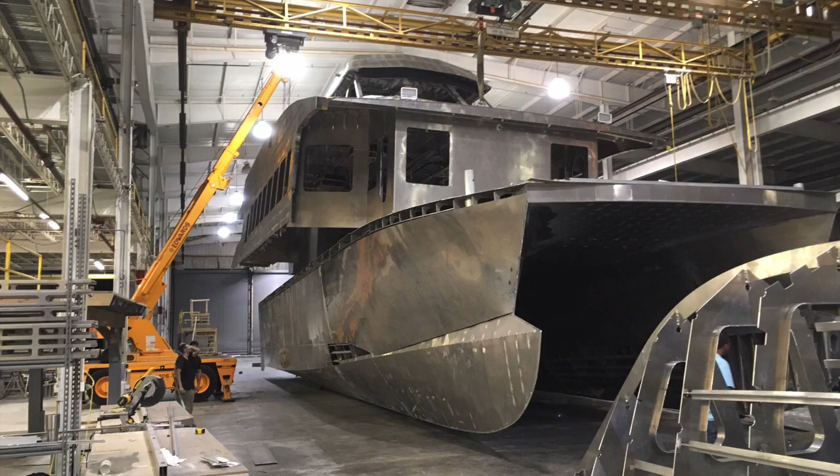I've been in the aluminum boat building industry now for 29 years. We're here today in the training center, and we're in the process of creating training videos to train our internal staff and grow the group. What I want to do is share with you some tricks with regard to the use of some of the small tools, and this will be really very specific to the fabrication of aluminum. So thanks for joining us.

I wanted to start out with one of the most common ones, one of the most dangerous ones, and one of the most misused ones, and that's an angle grinder. So this is a 9005B Makita grinder. This is one of my favorites. I do not represent Makita in any way. There's plenty of acceptable grinders to use. However, there's also some grinders which we really don't want to see here, and you really don't want to use for aluminum fabrication, even if you're doing it in your garage.

If you have a switch on the top here, and you're going to push that, it locks on. Almost all those lock on. But you never want to grind with that trigger locked on. So you want a trigger style thing, like a gun, okay? And it does have a lock, and there's no real good way to take that out, otherwise I would do that. Okay, we like this grinder for a number of reasons, and there's some good DeWalt ones and other brands. But we like it for a number of reasons.

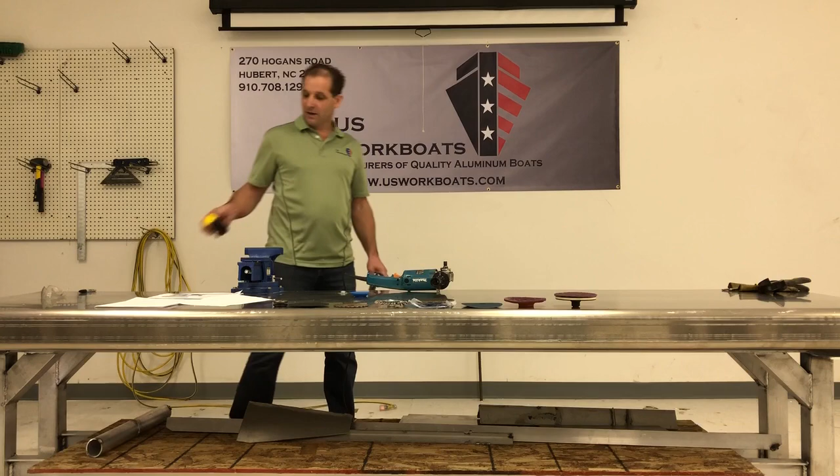The nut, okay, is actually a 5/8 nut. It's a 5/8 nut, and this is also another one. It's a 5/8 nut, and it has an inside hole here where it comes in. It's 5/8 of an inch inside. Okay, now I was using this stone yesterday. Kyle and I fabricated this bench out of mostly scraps out of the junk bin, by the way. And this is the most common setup to be used, 98% of the time. It's a flex cut grinding wheel.

Okay. It uses a certain backing pad. It comes new in the bag, in the box. This is set up for grinding of non-ferrous metals. This is the only pad to use with this wheel. Okay, this is the backing pad and the nut. It's a flush nut. Sits in there.

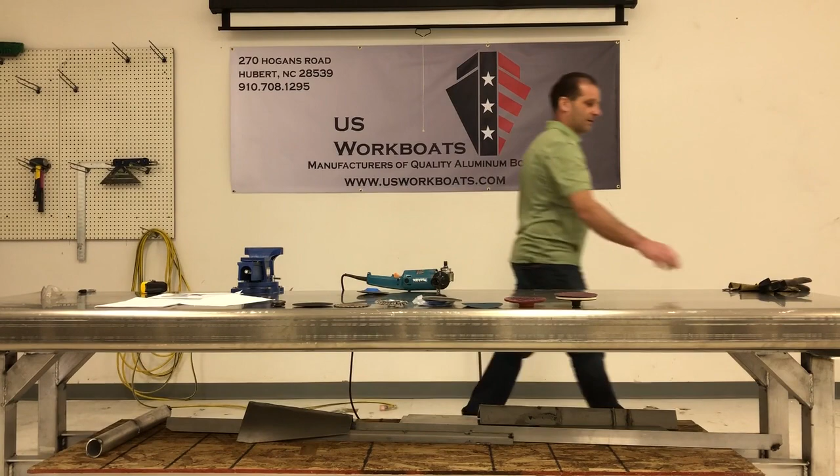When you buy one of these grinders new, it comes with a couple other things. It comes with this, which happens to be a simple little wrench, which happens to fit. I've seen plenty of you guys over at the vise screwing with this thing, right? That actually fits that. Now, most of you guys would just throw this in the trash, but it actually is handy to keep in your toolbox. It does fit that as well. It also comes with a guard. Now that guard definitely doesn't want to get thrown away. We want to keep that, but we only want to use that for a couple of different operations.

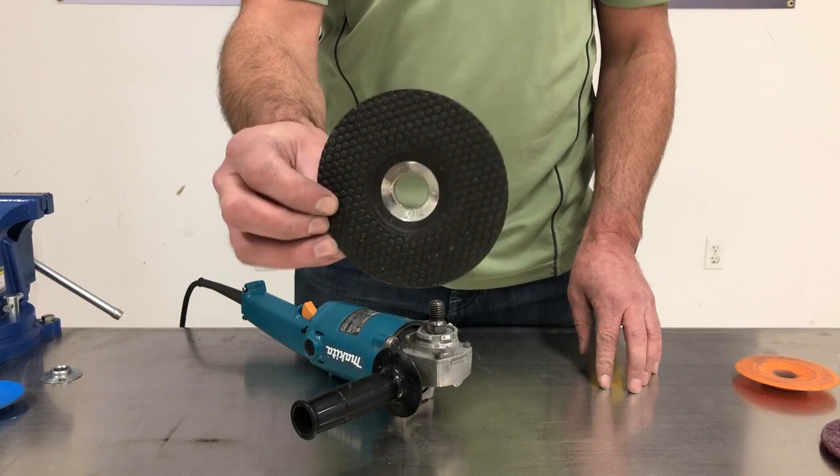Okay, we're going to go over the proper installation of a flex cut grinding wheel. This grinding wheel, as you can see, has a 7/8 arbor. It has a convex shape on it. It's got some bumps on it. This thing is specifically for grinding of non-ferrous metals, and for the proper installation of this thing, it's going to take a special backing pad that goes with it. They come new in a box.

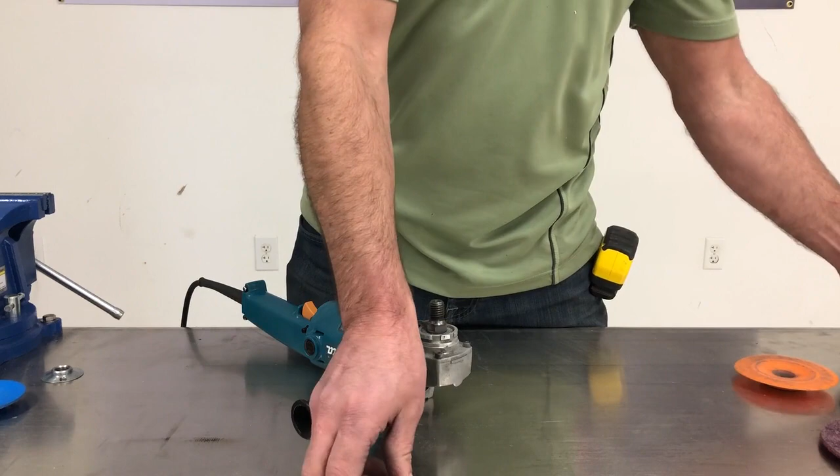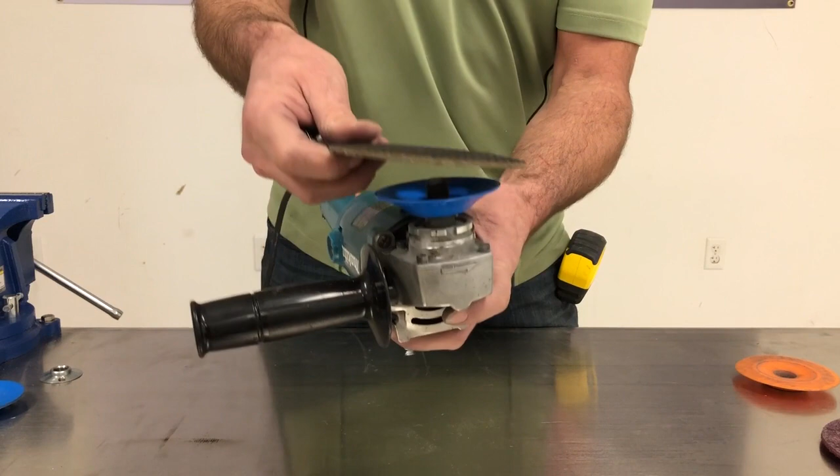These things come together. This thing goes ahead. It has a little metal piece in the back that's inset into it. 5/8 hole in the center, and then this here is 7/8. It's going to fit in there. This nut is going to go on. We must use this nut. You can see it's very thin, and it's got some shape here that goes into this dish.

Okay, we don't require a whole lot of tension on this. We can go ahead and just hold that lock and tighten it just about that much, and we're gonna be good to go.

Okay, we're gonna go ahead and put this sanding disc onto this angle grinder. And to do that, we need the proper backing pad. This is an example of a backing pad that's gonna work just fine for us. There's some things that we don't wanna use. We do not wanna use this. That's for our flex cut wheel. We do not wanna use this backing pad either, definitely the wrong one. We're gonna use something like this that supports this thing out near the edge. This one's actually designed for 4.5, and this is a 5.

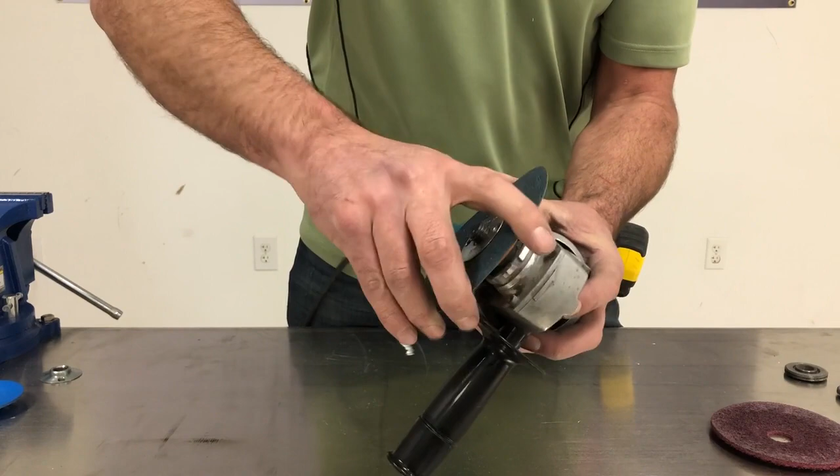They do make this in a 5, and I don't have one with me today, but the proper installation of that, it's gonna go ahead and go on there. We're gonna use this nut. It's important that we get this 7/8 center in here, into this. We push that in there, it's gonna go through. So, let's see if we can't get that started on there. We make sure as we're threading it in that it's actually in the center, otherwise it's gonna wobble all over the place on us. And that's gonna be a properly installed sanding disc, okay? And when we're doing our grinding work, it's gonna be flexible for us, and it's gonna finish stuff real nice.

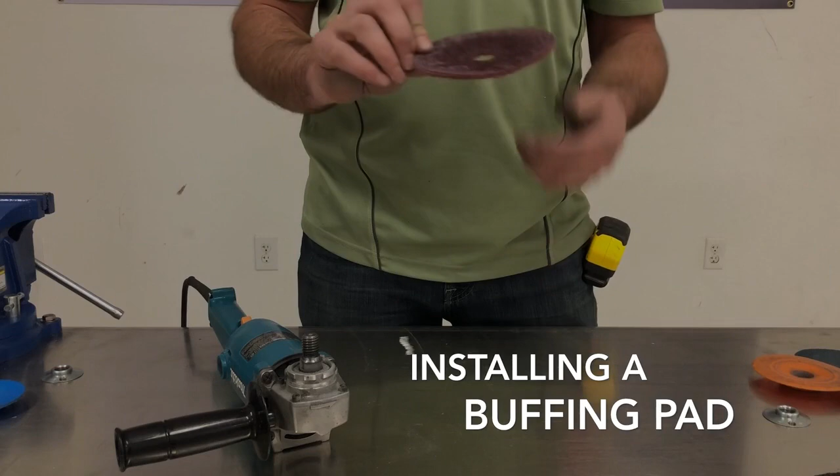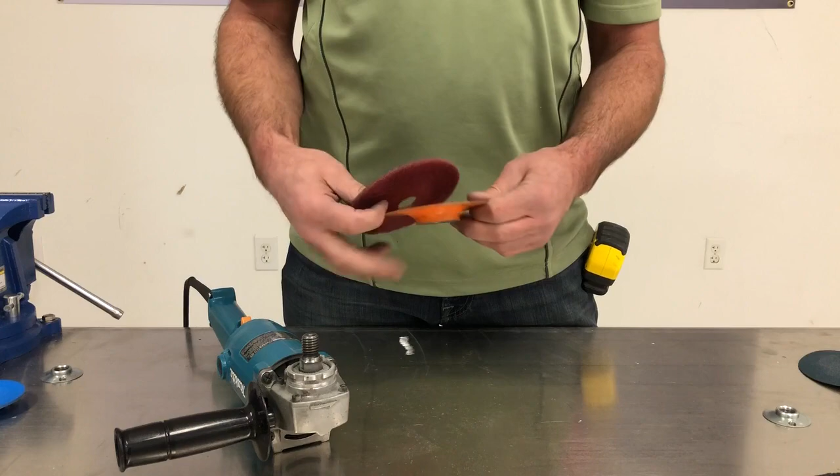We're gonna go ahead and install this. This here is a polishing disc, but you could use this to wash your dishes with. Very similar product, okay? It's not made of much, it's real bendy. It needs to have some proper support on the back. This is an acceptable backing pad for it. This is the same as you would use for the sanding disc here. But when we put that on there, we're gonna wanna use one of these nuts here, one of these tapered nuts. And it's gonna go on there and assemble just like this on our grinder.

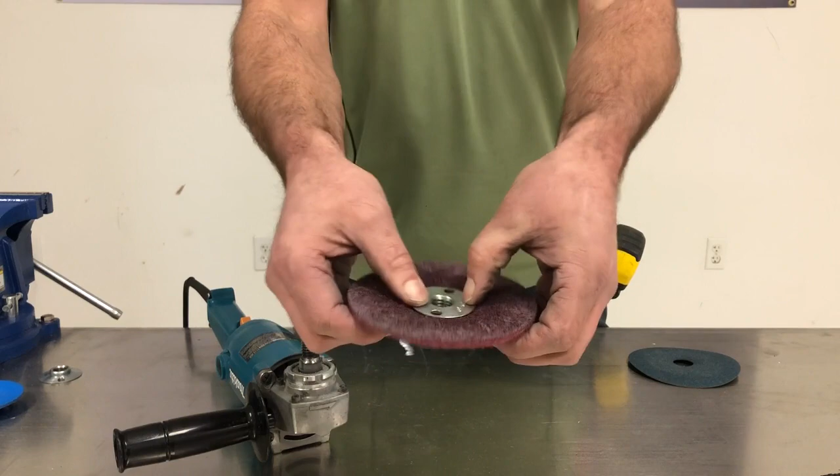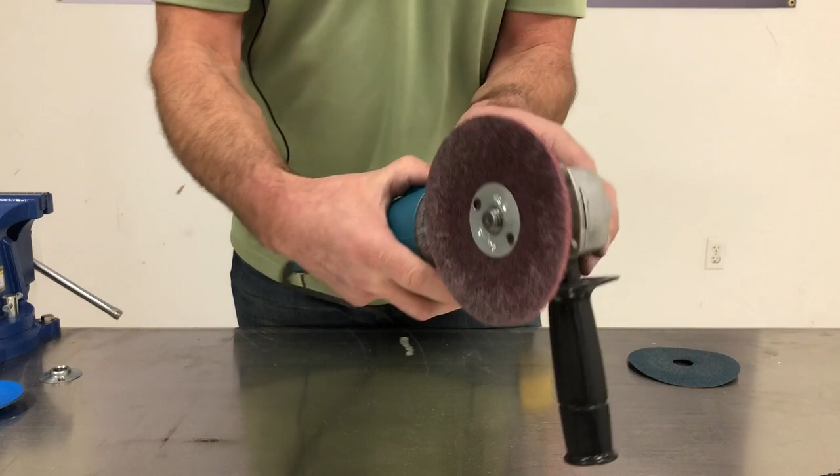We'll go ahead and put them on. As you can see, when we screw that in, it's gonna be down in below the surface in there, right like that. And that's gonna hold that wheel on there real nice. It's also gonna allow it some flexibility when we're doing our grinding work.

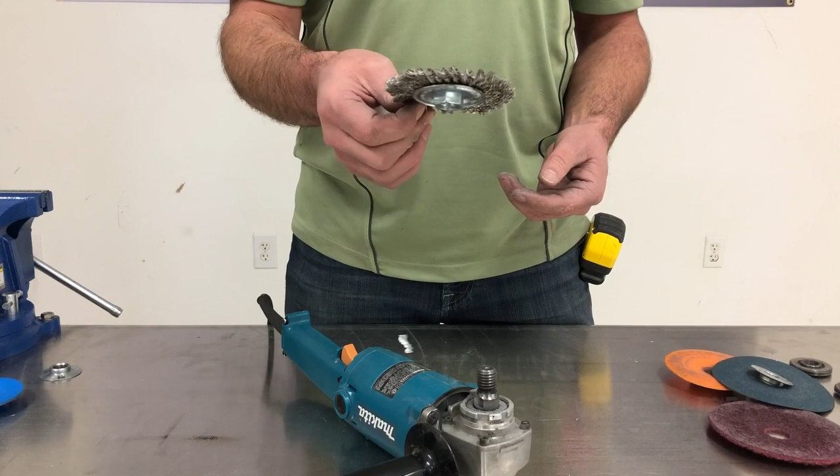Okay, we're gonna go ahead and put this stainless steel wire wheel in this grinder. We're gonna use this thing for cleaning up. Either we're doing refit type of work with it, or we're cleaning paint, or we're cleaning debris, or we're gonna prep for a weld, if something's been assembled for a long time but it hasn't been welded, and we're gonna get that clean there. So that thing is gonna go on, it's not gonna go on this way, it's gonna go on this way. And it really quite simply just threads right on there like that. And we don't have to over tighten that. It's not gonna be necessary because it's gonna be harder to get off as it is.

That's it, properly installed. This would be called like a cutoff disc, or I would call it a zip cut. It's one of the slang terms for it. It's real thin. This thing is specifically, we're never gonna grind, we're never gonna use the surface here like that. We're gonna use it to cut with. It doesn't work very well for aluminum, but it does work. We're gonna use this for our backing pad. It's a real small nut, comes with our grinder. It's got these ridges in it. This clips into this notch, real simple to install.

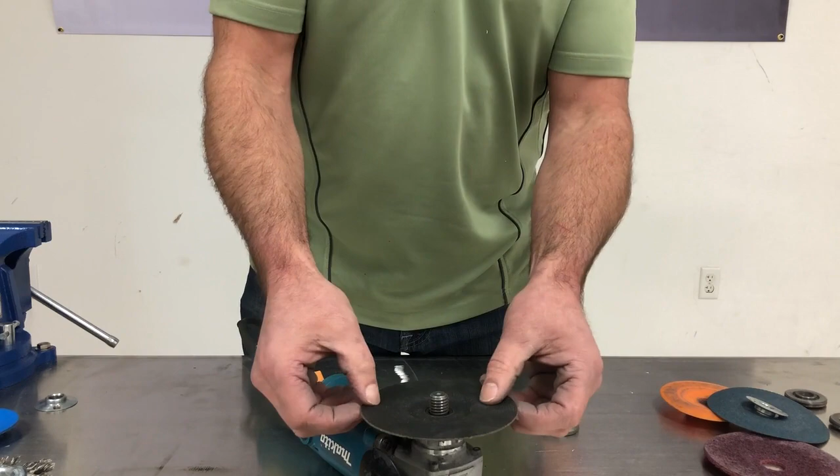We also, when we put that on there, as you can see, it's real thin, but we can see this comes this way, so it's important that when we take this nut, it also has that, it fits that. We're gonna put it on actually upside down, so that it's gonna tighten and hold properly on there. That's properly installed.

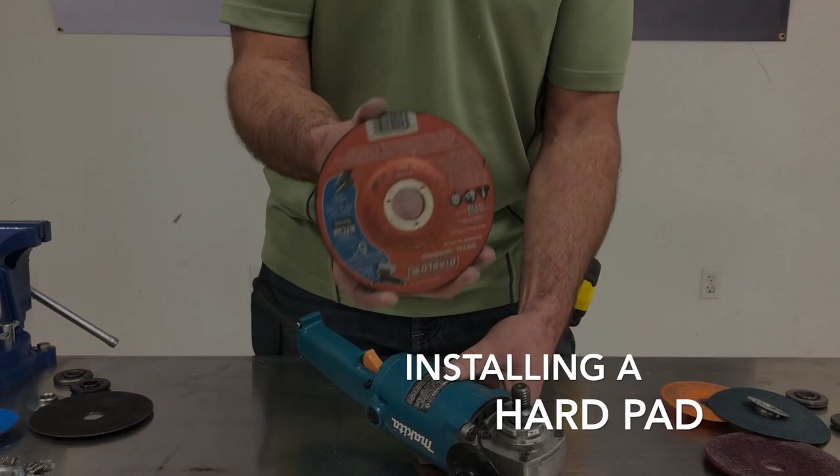5-inch grinder here, and we're gonna go ahead and put this hard pad on here. This hard pad is virtually useless for aluminum. I guess the only good thing about it is you'll never wear it out because it doesn't really do much cutting. However, there are instances where we might want to use the edge of that. It's going to be not very common.

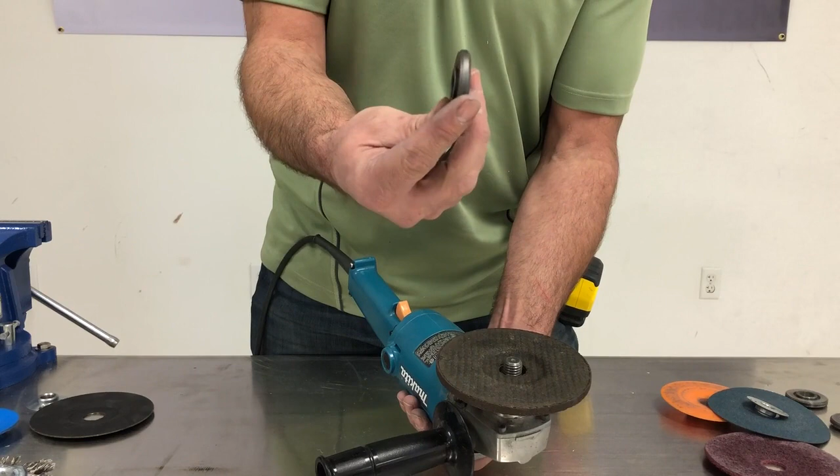If we do want to install that, we're going to use this steel backing pad that comes with it, and this nut, and it's going to clip into there just the same. Now it has this little ledge which is going to center that wheel. So that's centered now, but there's still some depth. When we put this on here, we want that also to grab in that hole like that. It's going to be different than our zip cut application. We'll go ahead and get that properly installed.

So we went through what we can put on here, and everything else is either incorrect or for some other application. We don't need anything else besides that.

Put the wax on — maybe we'll break and talk about the wax. There's a lot of kinds of wax that are manufactured. A lot of them are like a grease-based wax, but this one isn't very greasy at all. It's quite hard. I believe it has animal fat in it — I don't know the exact chemical makeup, but your dog would eat it. I think it has like cow fat or something in it. We don't want to use a lot of this. We want to use a little bit all the time.

If you're grinding and you don't have this near you, you're destined to fail, right? This is the most useful thing in aluminum fabrication, period. It'll make the CNC machine cut faster. It's not practical to put it on that machine, but it is practical to put it in the bandsaw, the grinder, the Skilsaw, the table saw, jigsaw, sawzall — any one of these things.

There's a couple of things that happen with the wax. It's got a metal bottom on it. People cut it in half at the bandsaw or other places and set it down. Welding's hot, right? We're working with metal and getting it hot, so it melts out underneath, and this wax gets all over the place.

Let's go ahead and talk about the handle.

All grinders come with a handle, no matter what the brand. These specific ones that I like the most do have it so you can put it on the other side. It's a right-handed world. I don't know, maybe somebody left-handed would like it this way. I'm not really totally sure about that.

But I wouldn't be able to use it that way. All the time I see it being used like this. What I will tell you is I don't want anyone to use it like that, ever. Even if you're working somewhere else or doing it in your garage, you don't want to use it that way, because you can't hold on to the thing. You might be able to grind other things, other applications, but you can't hold on to it. You're also not going to do near as much work because you're holding on to it either with one hand or with two hands, up around here. You're not supposed to be holding it there. That's not a handle. This part is a handle, and this part is a handle.

The other thing is you can lean on it. You can push on it. You can use both your arms. You can get more force on the thing, and you can use some of the power of the grinder that way.

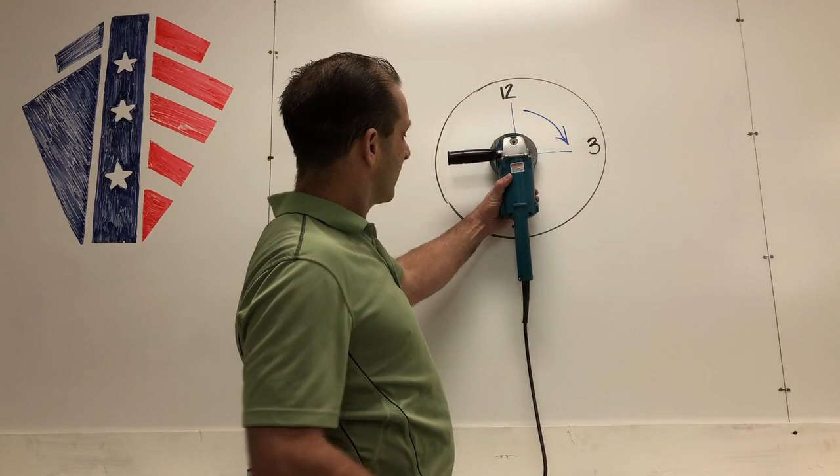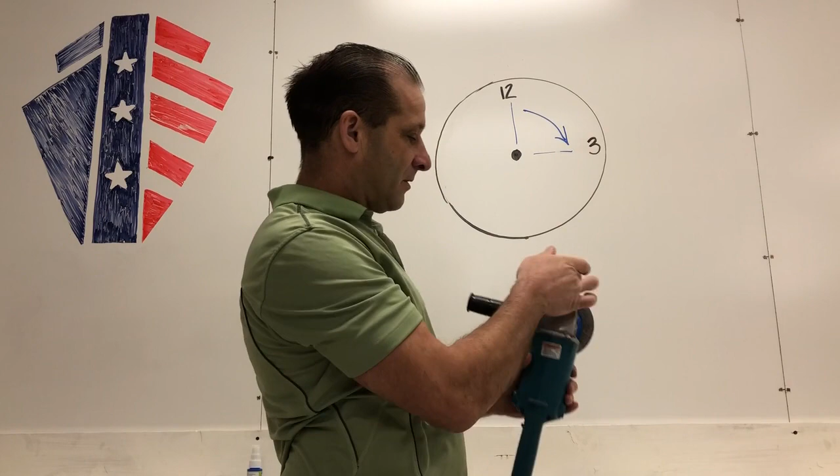So continuing on about this 12 o'clock to 3 o'clock, this is really, really important. This is totally about safety with this tool. If you're looking at that grinder with the handle straight down below you and over here, we want to use only that area of the stone. Super, super important, and we don't want to be over here. This would be between here and here. That is the danger zone.

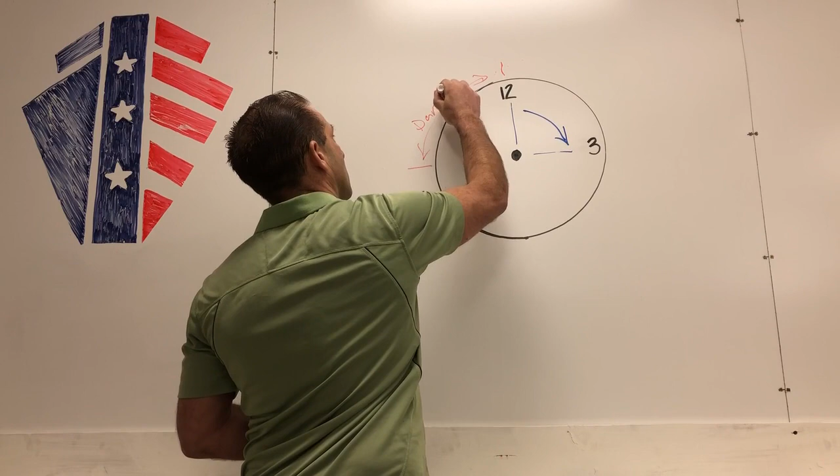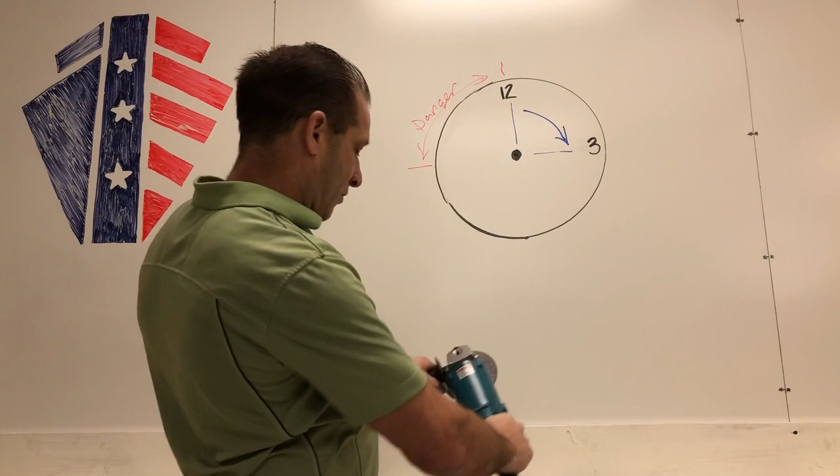That's where all of the accidents happen. Now, if you have this thing properly in your hand, what you're going to notice is holding it like this, your arms are the same length. So that 12 o'clock to 3 o'clock is actually going to be on the top when you're looking down on this thing. So here to here only, here to here only. The thing is pushing back towards you. It wants to come towards your body.

You know, you're not strong in here like this. If you're taking it from here to here, it's pushing to the side or pulling, and it isn't going to get away from you. It won't ever get away from you. You might use it on its edge, that's acceptable. You're going to use it on the flat a lot of the time, and you might be down below the 3 o'clock a little bit when it's on this flat position. But really, basically, all of the work is going to be done with a quarter of the clock face of the grinder. This is really important.

When I watch them catch, when I hear it smack, make a big noise, it's because somebody's got it in the wrong place. I watched somebody down there with the gouging wheel on it, gouging up here, over here, and guess what happened to him? He went to the hospital.

Grinder position. All right, so what I want to do here is get to actually doing some stuff, but I'd like to try and see if we can go through as many of these things and we'll relate back to them. So we've been talking about some safety issues, and you'll also hear me bring this up again and again through every class. This is about the quality of the work.

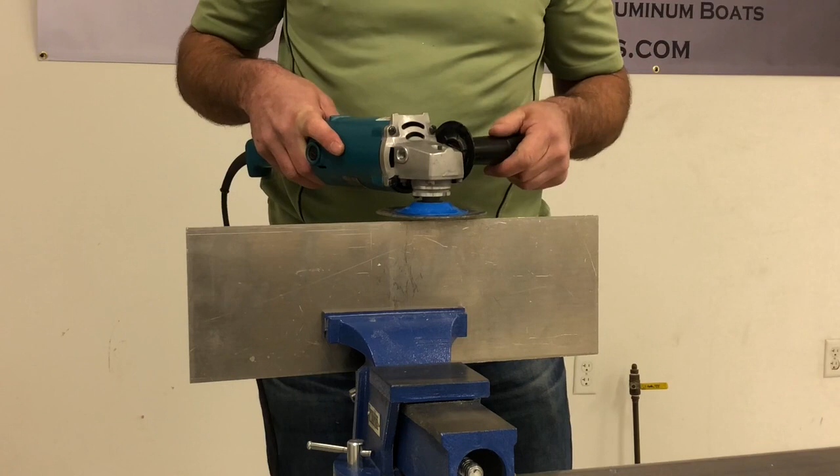I keep talking about the flat of the stone, 12 o'clock to 3 o'clock, and about this being flat. What we don't want to do is grind here, and we don't want to grind here. We can see our cuts. If we grind like this, our cuts are going this way. This way, our cuts are coming this way. It's going to give us very unsatisfactory quality. Quality is going to come here.

We need longer strokes. We're not going to sit there and go like this, we're not going to do that. We're going to go one long stroke.

Equipment-wise, we definitely want a minimum of a pair of glasses, something like an actual safety glass. By the way, I brought a whole bin of them up here if we need some, and we're going to do some of that today. If I'm doing any serious grinding work, I like a face shield. The face shields I've seen around here are flat across the bottom right about here, but I like the ones that go down like this, a V shape. They make a much better one than we've been using here. I like to have a face shield if you're really getting with it, but at a minimum we're going to use this and some earplugs.

A lot of people like to wear gloves. I don't wear gloves very much, and if I do, I usually wear one, because I like to use my hands. So I do have one, and I'll do a bit of that today. But there are some applications where we're grinding dusty things, especially pre-painted stuff, where we're going to use a dust mask.

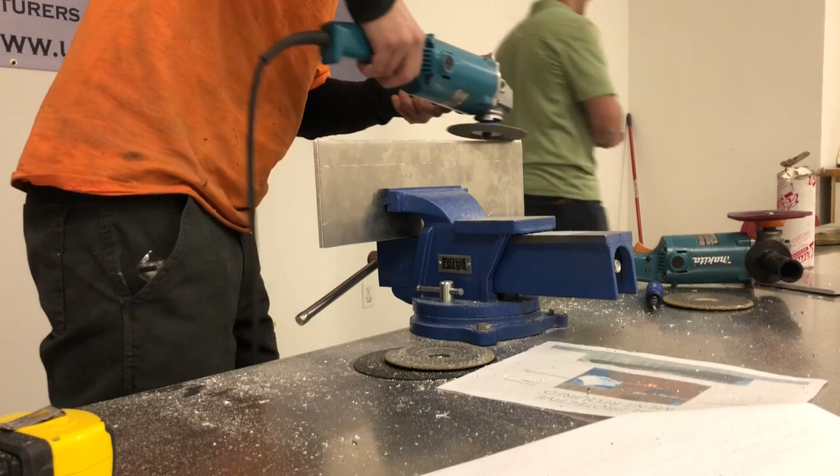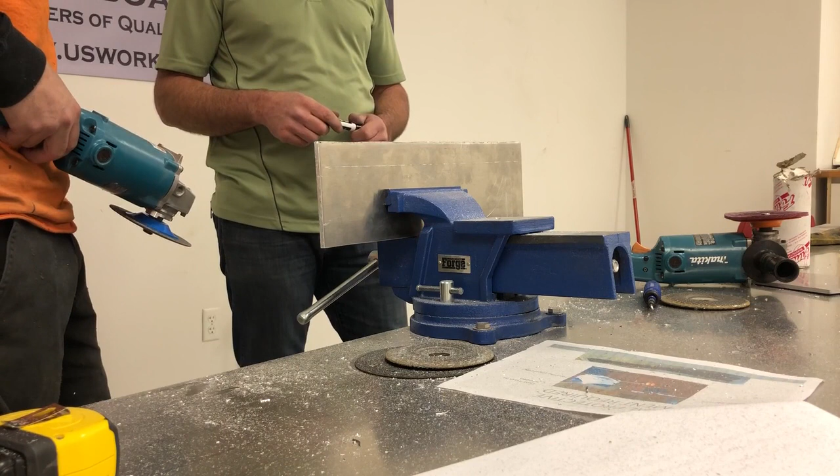Okay, now how long have you been doing this trade? Oh wow, what was I doing wrong? Okay, everything, all right? So we'll digress a little bit, we'll just get you to work on that one.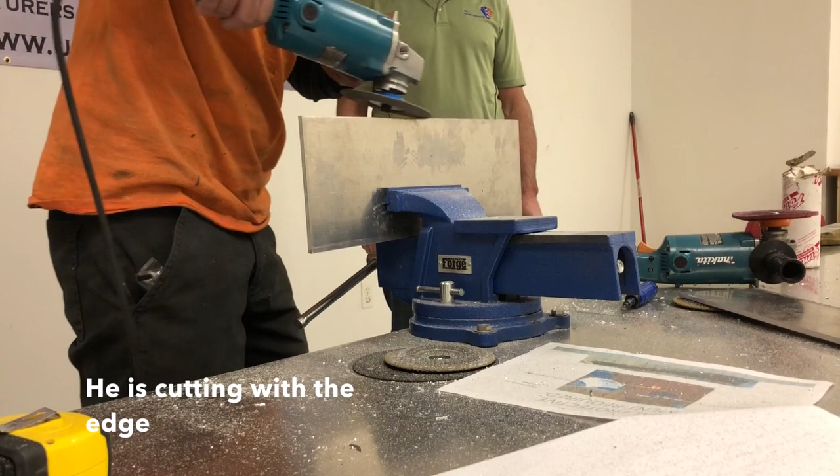So it's rough right here, I don't like it. I'll even deburr it, because I deburred that side. I don't like it, I don't like it at all, because it's wrong. We bring this up again and again through every class. This is about the quality of the work.

I keep talking about the flat of the stone, and I'm talking about 12 o'clock to 3 o'clock here. I'm talking about this being flat. What we don't want to do is grind here, and we don't want to grind here.

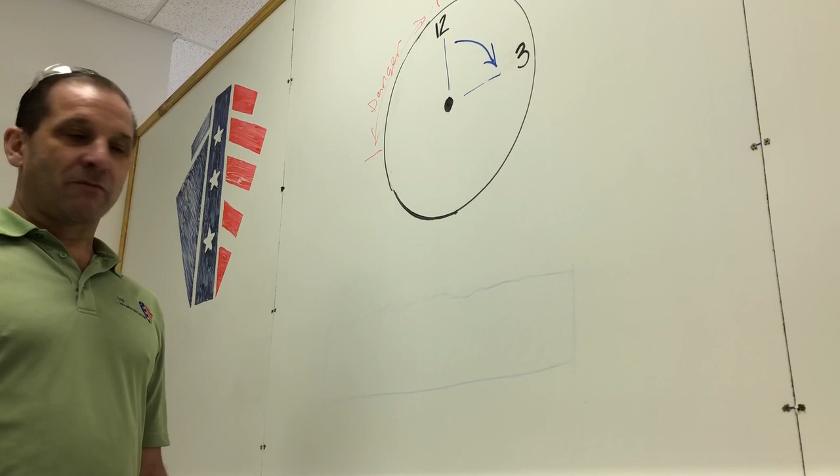I'd like to illustrate what was going wrong for the gentleman who was just on. I'm just going to draw a picture, basically, of our situation, and I'm going to draw some bigger bumps on the top here to illustrate what is going to make it worse.

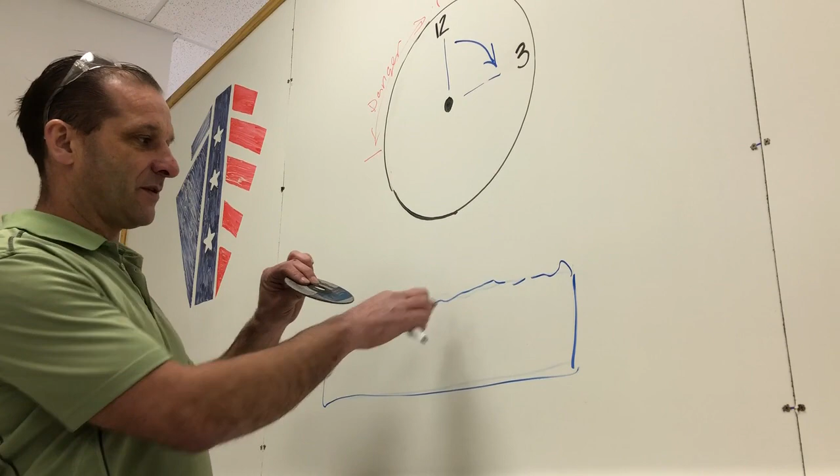So if we had that stone on the grinder and we're cutting on an angle, cutting with the edge of the stone crossways into this surface, it's going to follow in those hills and valleys, and it's actually going to make the situation worse, not better.

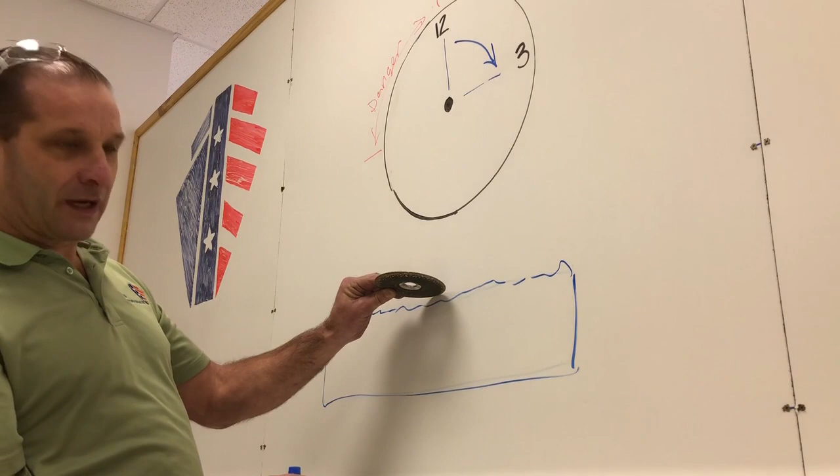What we want to do is get the flat, and again and again I'm talking about this flat, but what that's going to do - I'll change colors on the pen - is bring a new straight line through here, and it's going to take the tops of the bad bits off, and we're going to do the same thing again.

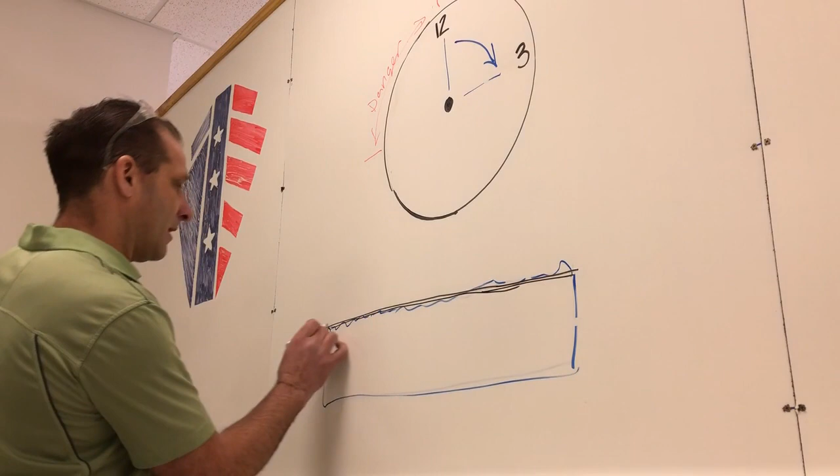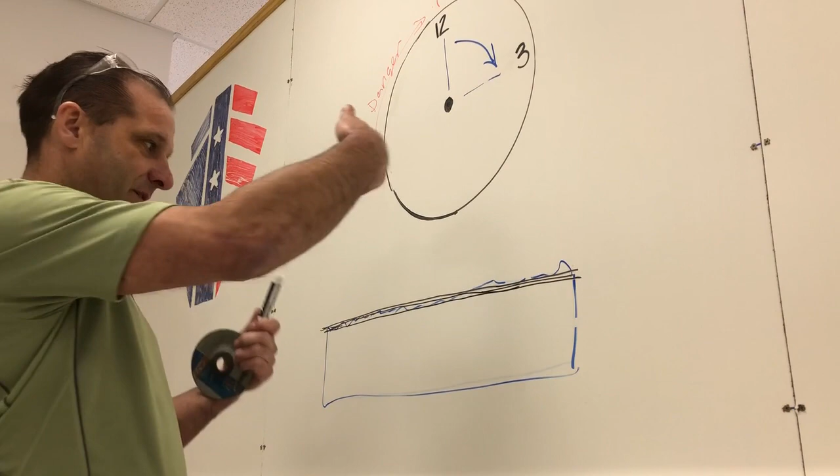If I can actually draw a straight line here, it's going to come through again this way, and before long those valleys - and this is an amplified situation - but before long we're going to get a nice straight line, and that's because of the position of our stone.

Biggest mistake people make, always - it's the biggest mistake.

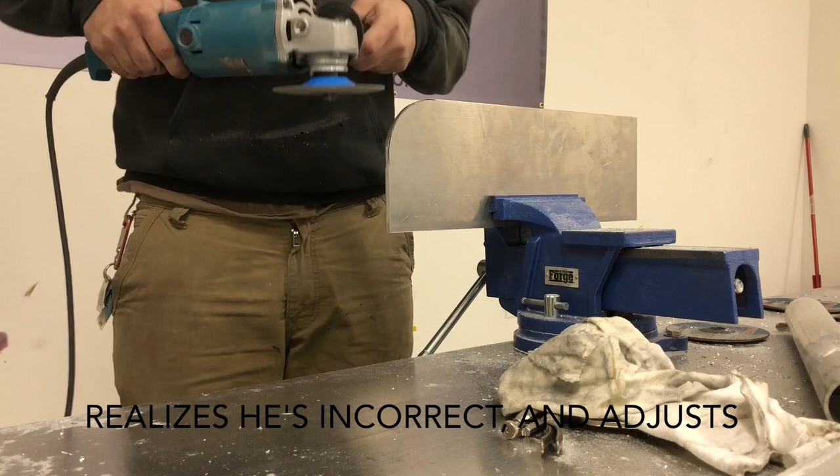There you go. I debated that in my mind. You just did. Can't even see the strokes now. The entire walk up here, I was like, yeah. Okay, so he jumped in there like he hadn't even come.

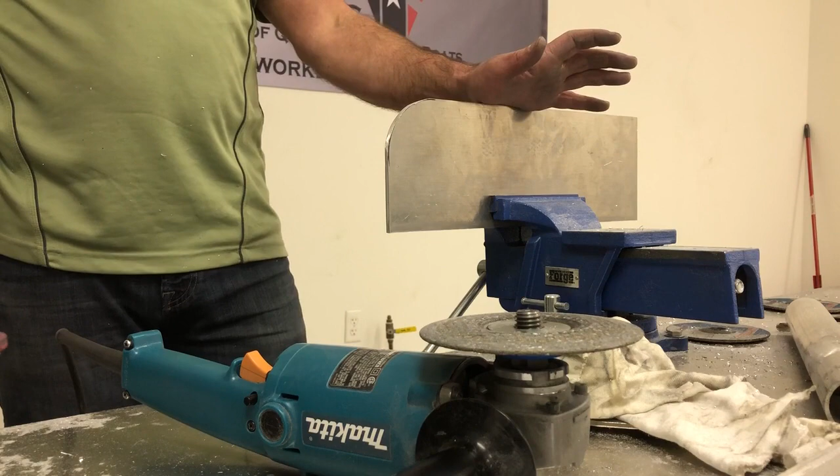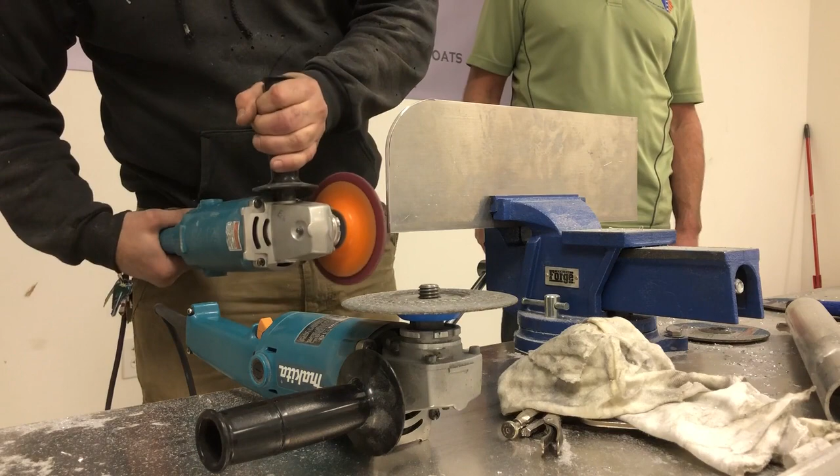You see how much better that looks, right? Yeah. You can hit it with this little. You can, if we deburr it, you can do that with the edge of it too, right? Acceptable? Take it home. We're gonna clean that up.

I think it sucks royally. Because you didn't do it the right way. So, I'm gonna do it my way, all right? And you're gonna watch, and we're gonna have a look at the difference between the two. Okay, so the last gentleman was doing exactly what we don't want. And I'm just gonna give you a close-up view of the cuts.

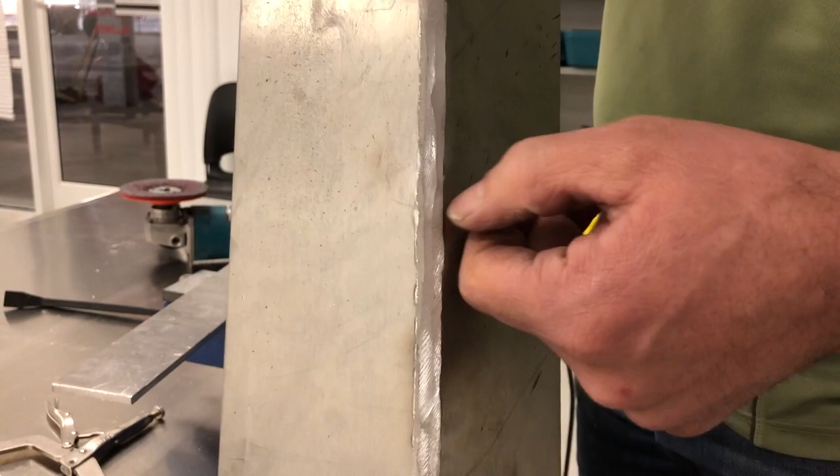And hopefully you can actually see these cuts are going across ways. And it basically looks terrible. Okay, we do not want that at all. This is gonna be close-up of a weld on, it's an open corner weld, and we're gonna put it here, and I'm gonna do a couple of different steps on this. I'm gonna use this flex cut wheel with this wax, and I'm gonna cut it. I'm gonna grind it in there. I'm gonna turn it over one time, do the other side.

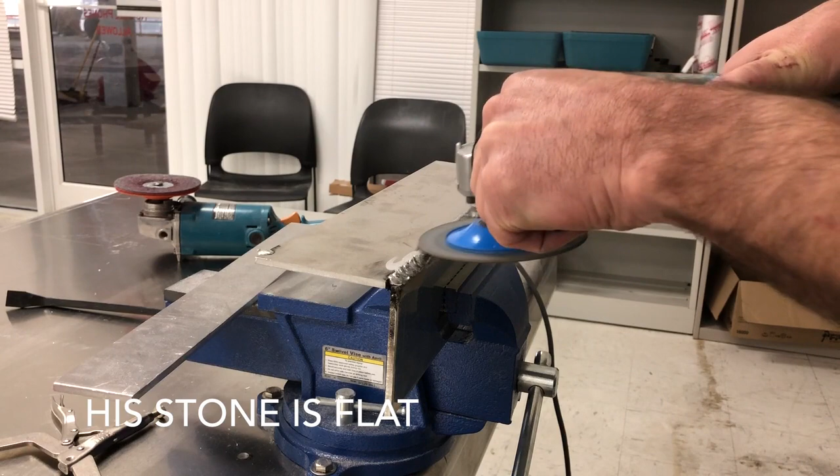Then I'm gonna come through here and 45 this off. And I'm gonna round in between. I'm gonna hit it with this. It's not gonna take very long. We're gonna give it a little buff. Okay, and then we're gonna look at the difference in the quality. So we are ready to go, and we've got lots of wax on our tool, so start with the noise. And we're gonna stay in tight. We're not gonna grind a whole lot, and we're gonna keep our stone right rocked about here.

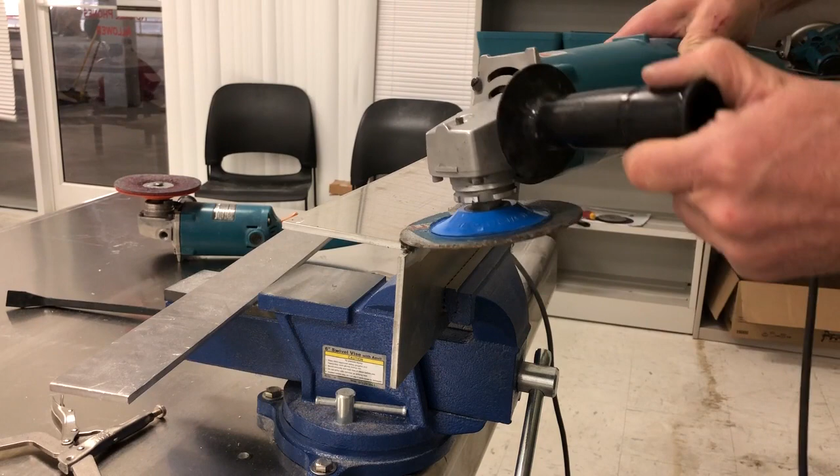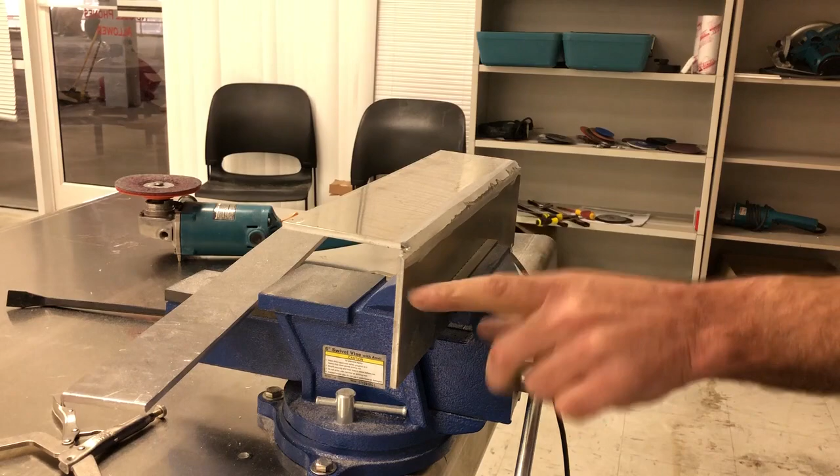Now we've taken that edge and this, we're gonna come with the 45. We're just gonna get the high spots, like those peaks we were talking about when we were doing a flat piece, and this is a corner. We can see them starting to disappear. The low spots are still here, and we may leave just a couple of those, but we're gonna get in there a little bit farther. Now I'm gonna come in around a 22, put one more facet, round it a little bit, flip it.

You notice how I'm using a nice big stroke, complete stroke through there. We're gonna be able to get rid of a couple more of those. The guy who welded it left us some holes that wouldn't be there if that was a little fuller.

Okay, we've got quite a nice actual finished product there, but since we still have a little bit more time, we haven't been very long on this thing, we're gonna go ahead and we're gonna put a straight edge on here. And you know, we're allowed to use any of the tools we want, so I don't think it's gonna be cheating. We're not gonna push really hard against there, we're just gonna use that as a guide, okay? And we're gonna do a couple of passes and that's it. Same.

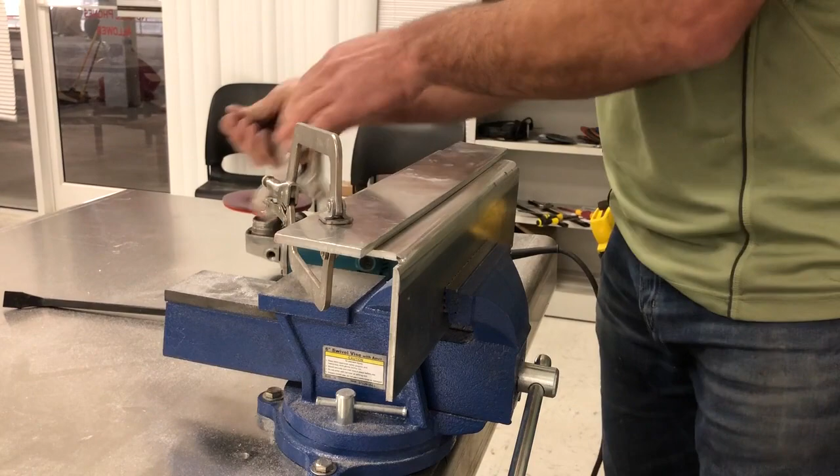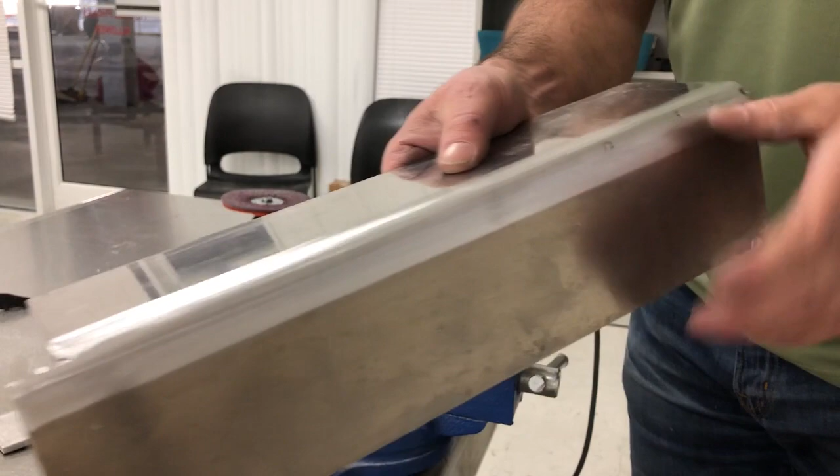We should have run a timer on that. You guys just go ahead and have a look at how that looks. It's beautifully nice and smooth. It's nice and round. There's a couple little holes. Those were holes in the weld. And if I was trying to do that perfect, I would have spotted those. Anyways, that is a beautiful job, and that's how we want to do it.

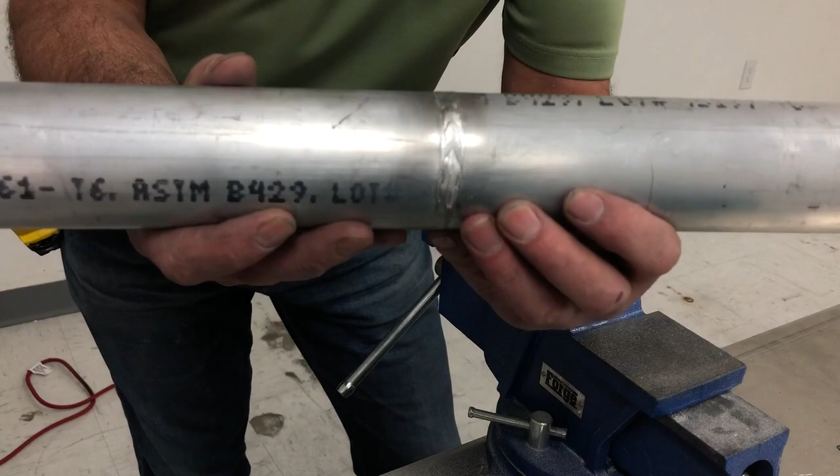Okay, folks, this has been butt welded together. This is just the same size piece of pipe. It's been butt welded together. Got a nice little weld on there. We're going to review the wrong way to do it first, and then we're going to do it the right way. I'll stop talking and start grinding here, but you see what this looks like. It's got a bump on it. It was V'd. We're gonna want this smooth, okay?

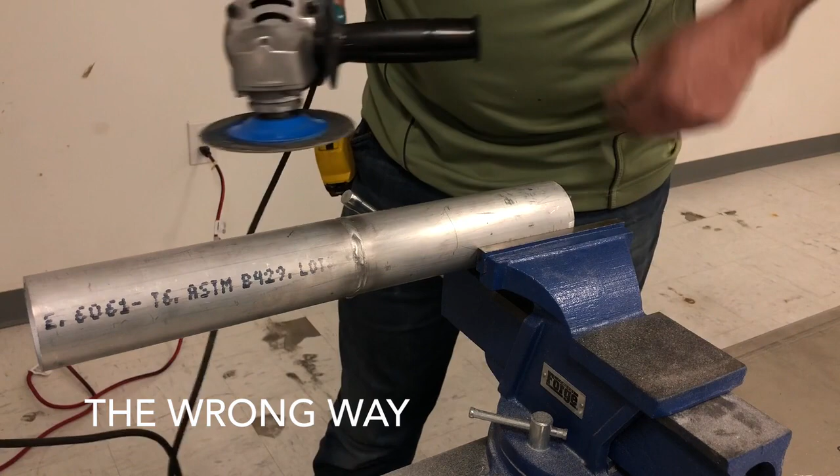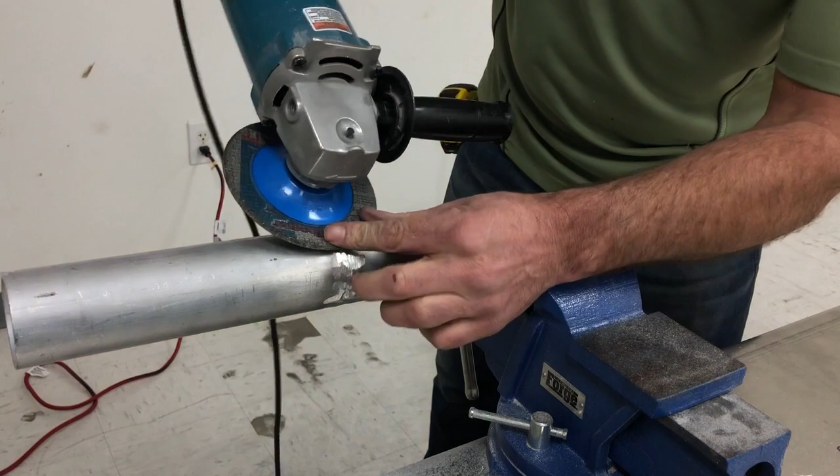Starting off incorrect. This is what most everyone does, folks. Most everyone goes this way. And I've switched around, and I'm gonna go ahead and do it the way that I want it done. I want it done this way, with that flat of the stone, taking the high spot.

Go ahead and use my second favorite pad here really quick. Now I'm gonna let you look at this. It's beautiful. It's beautifully smooth. Looks perfect. This, in my opinion, looks like a dog's ass. So it's just a difference in the position of the grinder, because the grind marks are digging into the surface. The stone is set on there wrong. This is what we want to see.

Okay, the plate we have that's joined together, it's been welded on one side. There's actually a bit of burn through here. So before we gouge that, we'll just take our regular flex cut wheel and we'll get some of that material off.

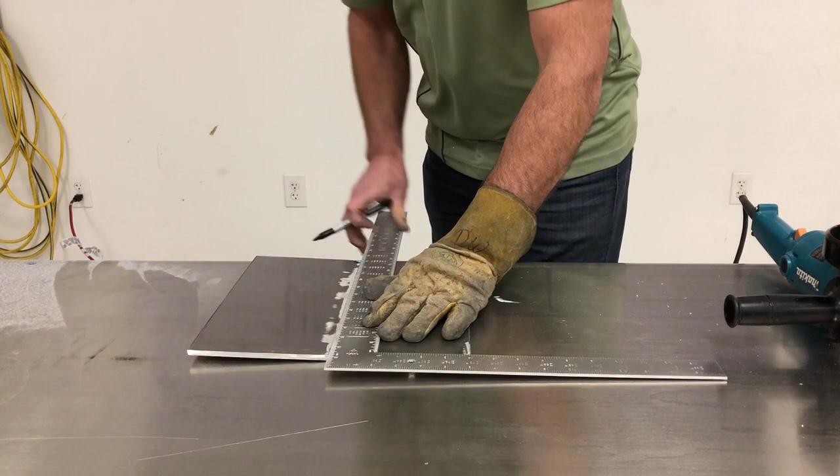It's important that we get that down, otherwise it's going to make it hard for us to control with this gouging wheel. Sometimes we're going to want to actually draw a line on here with a Sharpie because we ground off some of that penetration there, and to be able to see where we want to open that up, if we just put a line on there, we're going to do a better job.

Now this wheel, it's really important with this thing. We have the guard on it. We never want to cut, 12 to 3, that's where we want to be. We want to pull this towards our body so that the chips are coming towards us, and that way if the thing catches, it goes away from us, okay? So we'll do that. We'll hold the handle here like this.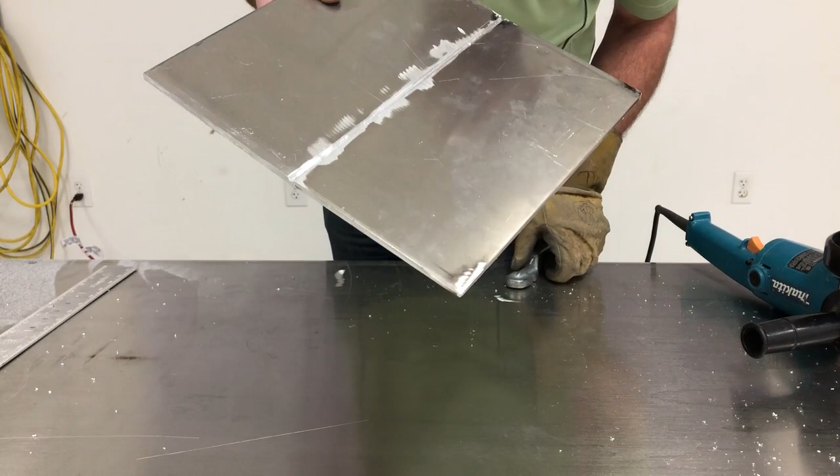That's given us a really nice shaped groove that we can come back in and weld. It's really opened it up nicely. If there was any bit of the root of the weld, you would be able to see, but that's all into new material. So that's one of the very few things that we would do with this. Highly effective. The last thing we might do with this wire wheel is actually clean this U-groove up.

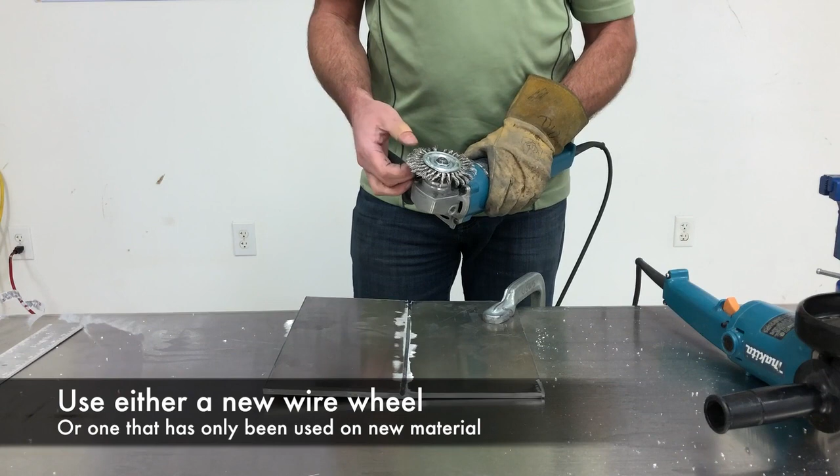Now, we want to make sure that we have a new wire wheel, or one that's being used only on new material. We don't want to use one that's been used for refurb work, because there might be paint or impurities of other kind. We're going to clean this weld area up.

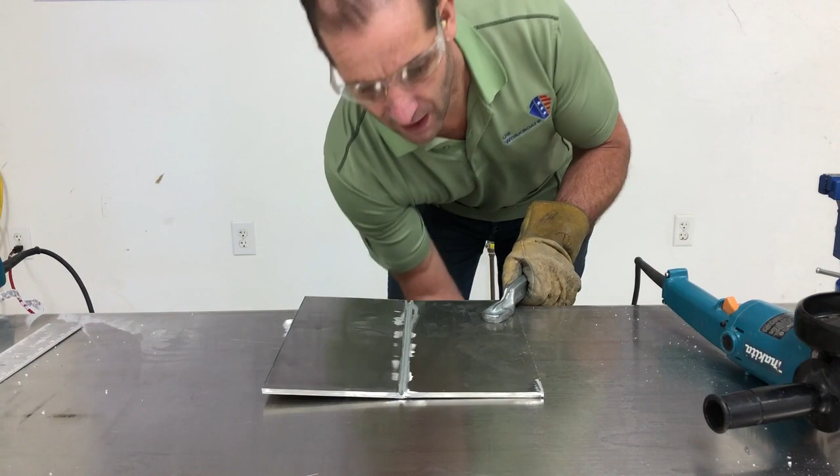So this has given us a really highly desirable area that we can actually weld. It's nice and clean inside of that root. We don't necessarily have to do that last procedure with new material, but with older material, we definitely always want to be doing that. Anyways, that's going to be ready to lay a nice weld in there.

So we're going to do the last procedure here with this angle grinder. We've got a hard pad on here. This one is a steel hard pad. As I said the other day, virtually useless. However, there is maybe one application for that, and that would be to clean up an inside radius.

So we're going to do a 3-step procedure on this if we're cutting an inside radius, and I'm going to use this circular saw. Also going to use this Harbor Freight, a beautiful jigsaw. Cut a bit of a radius in there. We're going to clean that up, and then we'll wrap up the grinder use section. I'm using a couple other tools today because this piece isn't already cut for us. So we're going to get started. All right, first is going to be the skill saw.

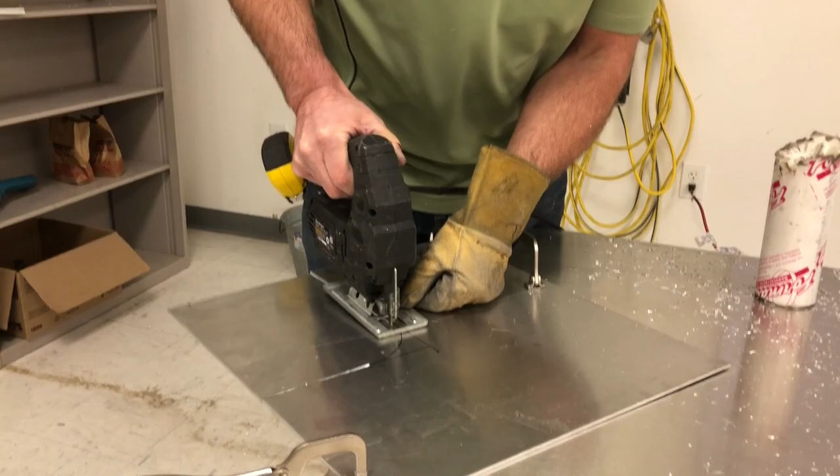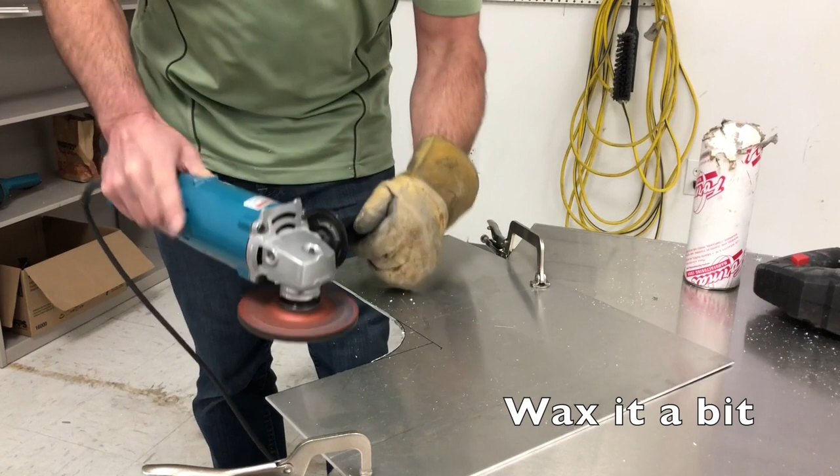Now we've successfully got this corner cut out. What we really wanted to demonstrate is using the edge of this hard stone. Let's go ahead and wax it a bit. And we're going to stick it in the edge here.

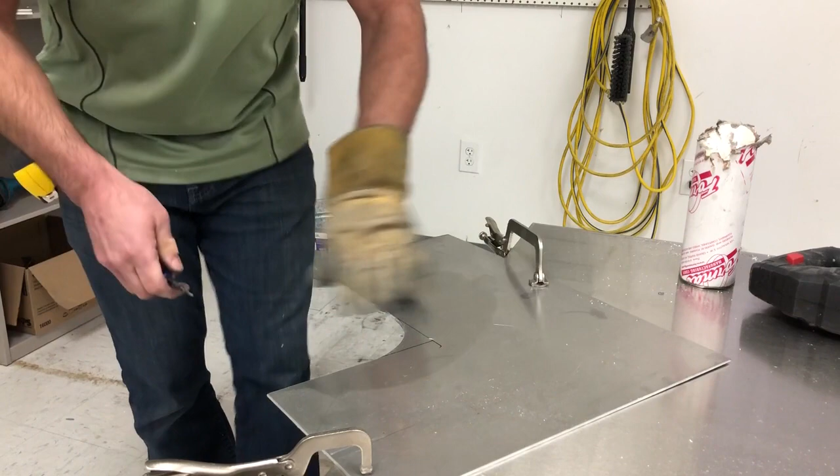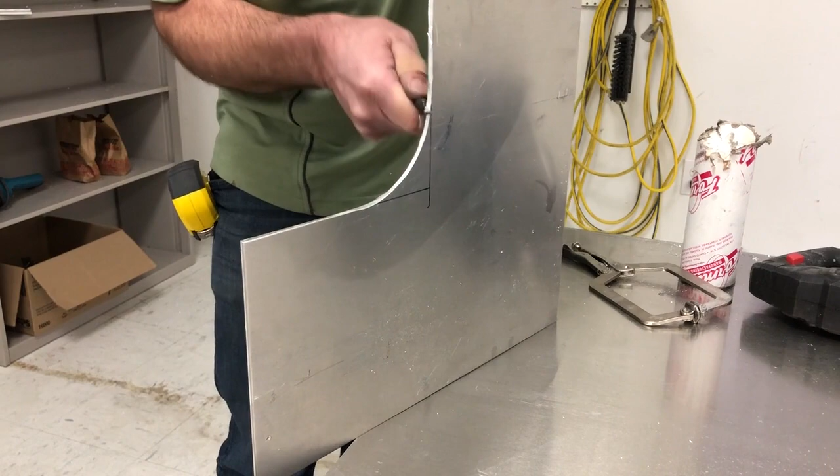And although, as discussed, that's really basically pretty much a useless tool, that's probably about the only time we were really going to want to use that, because what that'll do is that'll clean the inside radius. That'll make that real nice right there. And so that's about the only thing we would ever do with this stone. Besides that, throw it in the corner of your toolbox.

This wraps up the grinder section of these videos, and if you use this tool exactly how I've shown you, you will never hurt yourself with it. The quality of your work will skyrocket, and your speed and productivity will increase tenfold.